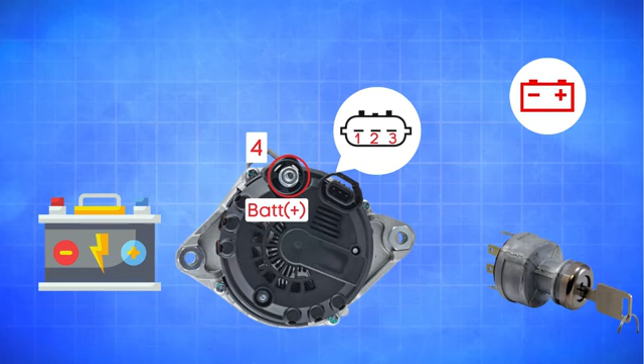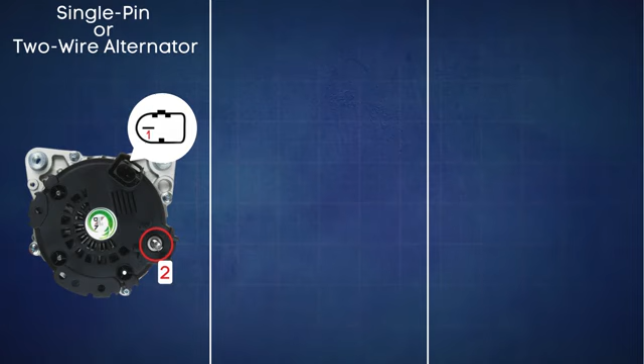Hey there! In this video, we're diving into the wiring connections of a car alternator, also known as the battery charging system. Now, alternators come in different configurations based on the number of wires or pins they have. For example, single-pin or two-wire alternator, two-pin or three-wire alternator, three-pin or four-wire alternator. We'll break each one down to help you understand their wiring and functionality.

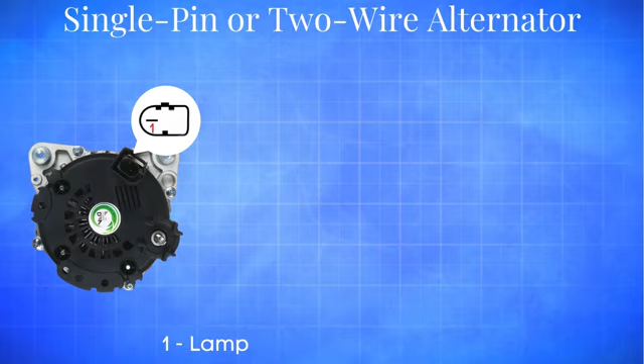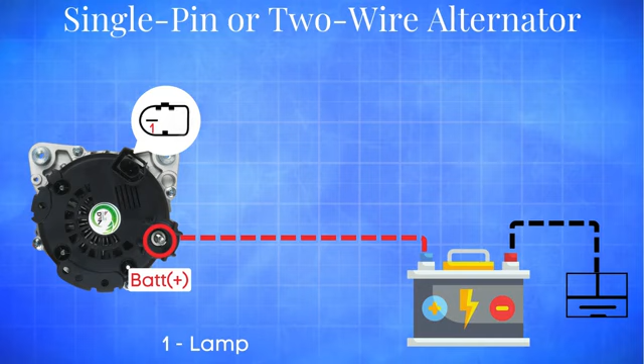So let's get started with the single-pin or two-wire alternator. In this type of alternator, there's a single-pin connector, but it actually has two-wire terminals. Let's break this down. The positive terminal is connected to the battery positive terminal. This charges the battery while the alternator is rotating. The other terminal of the battery is grounded for completing the circuit. Now, the single-pin connector connects to the ignition switch through the dashboard battery warning lamp.

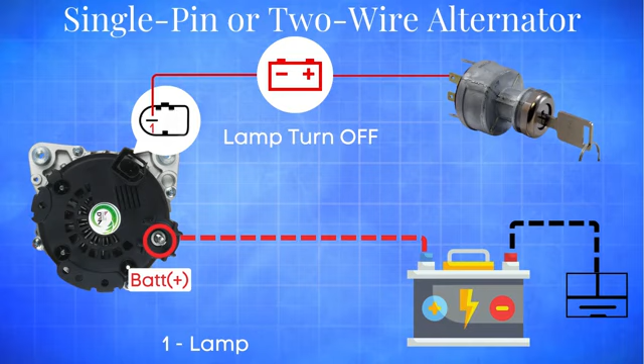Here's how it works. When the alternator is not charging the battery, this connector acts as a ground, which is why the warning lamp glows when you turn the ignition on. As soon as the alternator starts charging the battery, the lamp turns off. Finally, the alternator is grounded through its negative terminal. But here's the twist: we don't consider a separate terminal for this connection because it's grounded via the metallic body of the alternator. So while it's called a single-pin or two-wire alternator, technically you could say it has three terminals when you account for the grounding.

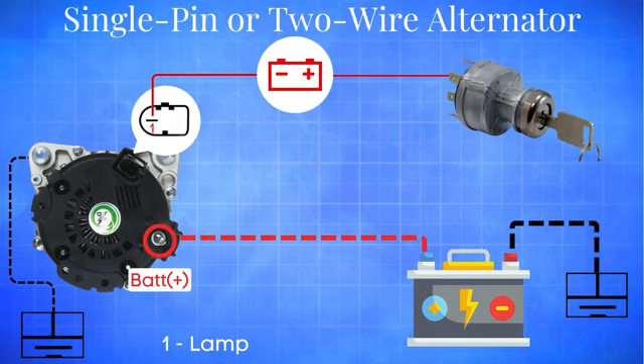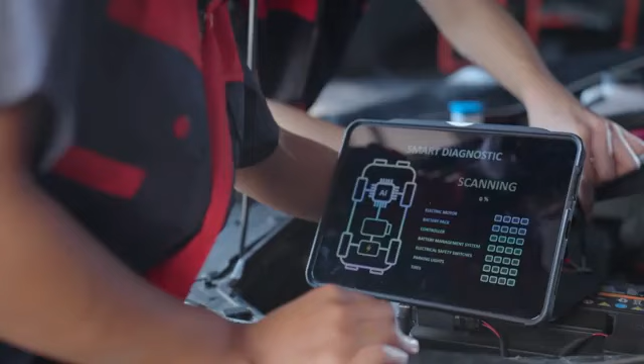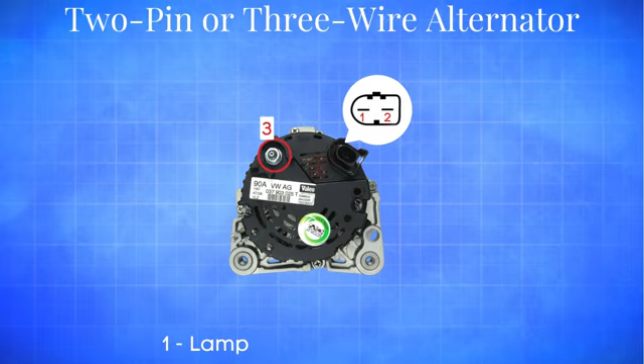All right, now let's dive into the two-pin or three-wire alternator. In this type of alternator, there's a two-pin connector and three-wire terminals. Let's break it down step by step. Just like the single-pin alternator, the positive terminal connects to the battery positive terminal, which charges the battery. The other terminal of the battery is grounded to complete the circuit. Now, one of the pins connects to the ignition switch through the dashboard battery warning lamp. This lamp indicates whether the battery is charging or not, similar to the single-pin alternator.

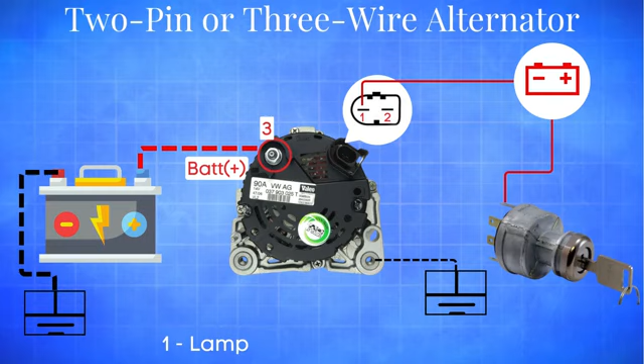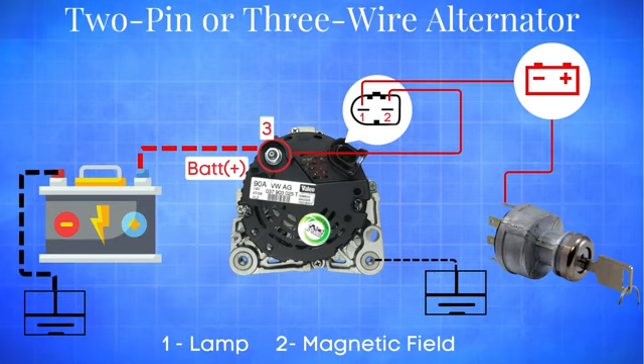The second pin is where things get interesting. It's for the magnetic field. This pin supplies voltage to excite the alternator and start its operation. This is the key difference between the two-pin alternator and the single-pin alternator. A single-pin alternator doesn't have a magnetic field pin because it uses a permanent magnet. This eliminates the need for external excitation voltage, but makes the alternator heavier. On the other hand, the two-pin alternator uses an external voltage source for excitation, making it lighter and more efficient.

All right, let's move on to the three-pin or four-wire alternator. In this type of alternator, there's a three-pin connector and four-wire terminals. Let's break it down. Like the two-pin alternator, we have a battery positive terminal to charge the battery, a pin connected to the dashboard warning lamp via the ignition switch, which lets you know whether the alternator is charging or not, a pin for the magnetic field, which supplies voltage to excite the alternator and start its operation.

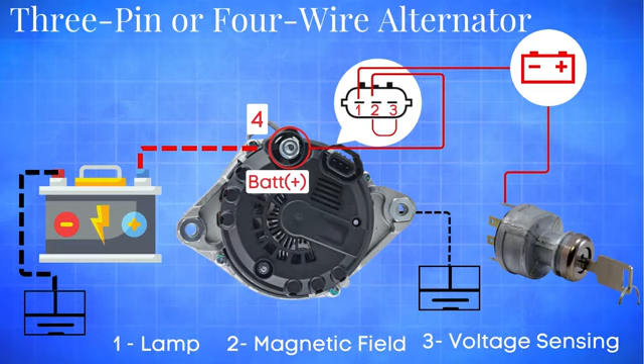But here's where things get interesting, the third pin. This is the sensing voltage pin, and it's only found in alternators with a built-in voltage regulator. The voltage regulator is a smart component that monitors the alternator's output voltage. It adjusts the magnetic field voltage to maintain a steady output, preventing the alternator from overcharging or undercharging the battery. Without this sensing pin and regulator, the alternator can't fine-tune its output. That's why the three-pin alternator is a step up in efficiency and reliability.